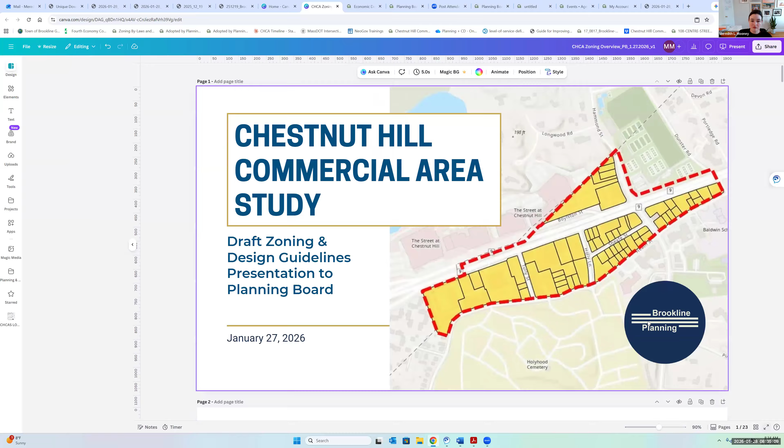And then we're also joined by our team at Sasaki, Martin and Ethan, who have been wonderful to work with as well. They're going to be presenting an abbreviated version of the design guidelines here in just a minute. But I did want to share my full screen and just walk through a quick presentation to orient you on some background about the broader Chestnut Hill commercial area study that the zoning and design guidelines have emerged from.

The origins of what we're now calling the Chestnut Hill Commercial Area Study are in the 2005 Comprehensive Plan. This was identified along with a series of recommendations you could put under the bucket of creating a gateway west along Boylston Street. I think the Planning Board is very familiar with the focus and attention we've had on Gateway East, in the Brookline Village area at the Boston-Brookline border, with the infrastructure improvement project and a lot of the development around Brookline Place.

So the vision in 2005 was that equal attention would be placed on the Chestnut Hill commercial area as the Gateway West. There was a suggestion about creating a district plan, looking for more opportunities for commercial mixed-use development, and amending the zoning to allow for broader uses. It talked specifically about the importance of amending the Office 2.0 zoning for the Chestnut Hill Office Park at 1280 to 1330 Boylston Street. Fast forward almost 20 years later, we are now talking about the Chestnut Hill commercial area and the district commercial area planning context.

Prioritized in the 2005 Comprehensive Plan. These are just a couple of important key considerations that we've been talking about today with this work.

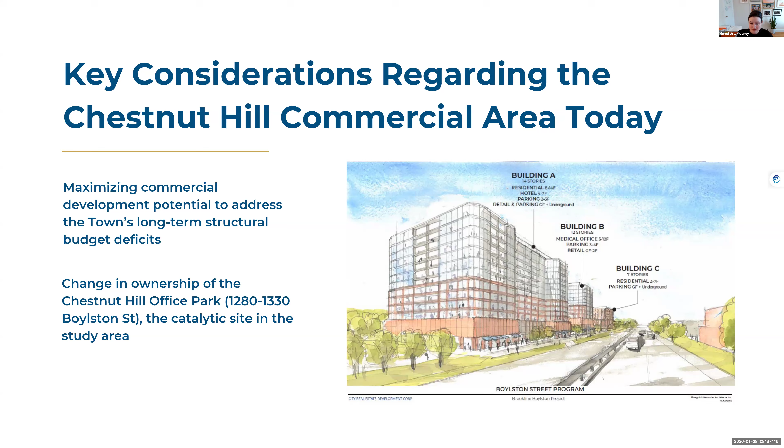Given the increased sense of urgency around the long-term structural budget deficits the town is facing, maximizing the commercial development opportunity in the Chestnut Hill commercial area is certainly a leading priority. As we were preparing to launch this study in spring of 2024, there was a change in ownership of the Chestnut Hill Office Park, 1280 to 1330 Boylston Street, a really uniquely large site throughout town—over 5 acres. It's something we've been talking about collectively for decades in terms of its economic development potential. Within the context of the Chestnut Hill commercial area study, redevelopment of the site really has the potential to be the catalyst for the evolution of the Chestnut Hill commercial area as a whole.

So the study goals, as we've talked about, are the importance of incentivizing significant net new commercial tax growth, trying to incentivize as much commercial development as possible, and then enhancing the livability and identity of the Chestnut Hill commercial area.

This is an overview of the timeline process we've undergone through the study work. We launched in spring 2024 with outreach and community engagement. This has been a staff-led initiative, in contrast to the select board appointed study committees we've traditionally had for these. We're experimenting with a new format.

We've been working with a community advisory group, which has included Mark as the planning board representative, and we're very grateful for all the time and energy Mark has invested in this. Blair has also attended a lot of those meetings. That group has been providing guidance and feedback to staff as we worked our way through this process. They've convened almost 20 times.

We've also been working with a subcommittee of the Economic Development Advisory Board that's been very focused on assisting staff with the study recommendations. The subcommittee with EDAB includes a lot of people who are actively, as part of their day jobs, involved in real estate development, and they've been very helpful in providing input about how we craft zoning that's actually going to be usable from the development standpoint.

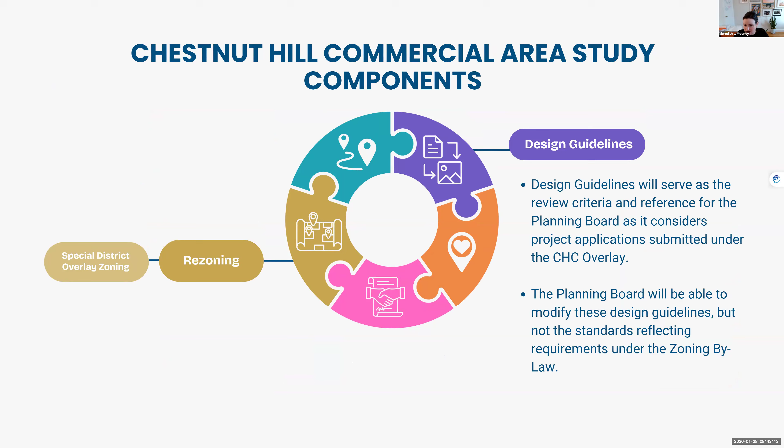The planning board will be able to modify these guidelines, with the exception of the standards baked into the zoning bylaw. But this is going to be your document, one that can evolve to reflect best practices and industry standards.

And that is just my introductory table setting. I will stop sharing and turn things over to Ethan and the Sasaki team.

Morning, everyone. I'm Ethan Lay-Sleeper, a senior planner at Sasaki, here with Martin. Martin Zogren, urban designer principal at Sasaki, working alongside Ethan, who I'll let run through the overall presentation so we get through it pretty quickly.

Yeah, sure. So we'll try to get through this in about 25 minutes. I know some folks have to leave at 9:30, so I want to leave enough time for conversation. I'll go fairly quickly, but we can always come back to slides in discussion. So let me share my screen.

Okay, so as Meredith said, this is an abridged version. Can you all see the presentation? Great. An abridged version of the design guidelines will give you a quick overview of the existing conditions. I'm sure a lot of you are familiar with those. We'll talk a little bit about the planning framework and what the objectives are.

Meredith alluded to those relative to the economic development potential, and then we really want to focus on the public realm and transitioning this from a somewhat disjointed series of streets and parcels and land uses to something that in the future can be more consistent with an intentional identity around new commercial uses and improved public realm and open spaces.

And then we'll talk a little bit about the massing controls. Those are what the advisory committee meetings have focused on and are really where the design guidelines and the zoning interlace. They're the elements that govern heights, setbacks, and density.

Then we have some conceptual eye-level views just to give a sense of what the existing conditions are, what the zoning envelopes look like, and then what architecture and building bulk might start to look like in the future. Not designs by any means, but just intended to convey a sense of scale.

And then in the appendix, we probably won't have time to get into that in the presentation, but happy to go into it afterwards. We have the design controls, which are a little more specific than the massing controls. They get into recommendations about materiality and have suggestions for future developers and architects to follow relative to the public realm, commercial buildings, residential buildings, and also parking structures. We've also done some quick shadow studies, just looking at the impacts of the zoning envelopes.

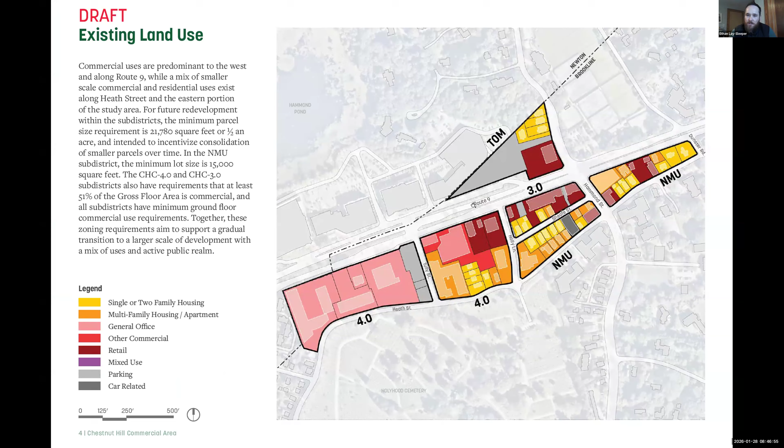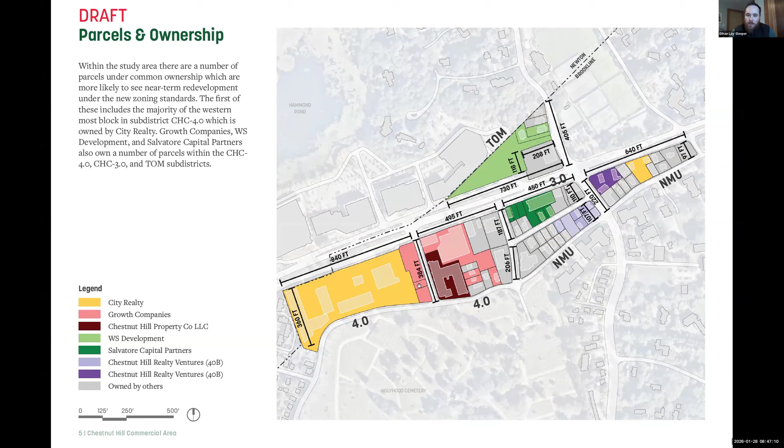The easternmost extent of the site, zoned as NMU, is largely a series of smaller lots, and they start to get somewhat bigger as you move further west and north into the transit-oriented district. Ownership on the east, all the parcels in gray, is varied. The parcels with colored fill show where there's consolidated or common ownership between parcels.

This is a map showing the zoning district. The neighborhood mixed use zones on the east side are comprised of largely smaller lots with disjointed ownership. The commercial 3.0 area has some smaller and larger lots than the 4.0 district west of Tully Street, with a large proportion owned by City Realty. The 4.0 district east of Tully Street has a fair amount of parcels owned by growth companies, and the transit-oriented mixed-use district has some parcels owned by WS Development.

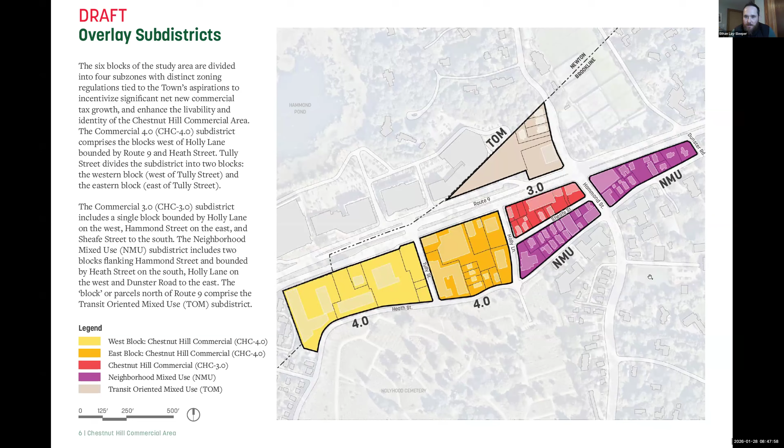So the planning framework - we reviewed some of the community engagement work that was done to arrive at these development principles. First and foremost, we want to develop this area as a unified district.

To Meredith's point about the economic development opportunity here and the budget shortfalls, we're prioritizing high density mixed use development to increase commercial tax revenues, while emphasizing green space and environmental resilience, thinking about how parking can be provided to ensure adequate parking without it being a dominant presence, and creating a pedestrian first environment.

There are some subtle things we're doing with setbacks to create more room for pedestrians, and requiring high quality architectural design focused on a human scale. That's where the massing controls and design controls start to work together to modulate building massing and form, but also think about materiality and articulation.

And certainly with the transit-oriented mixed-use district, we want to maximize transit integration and reduce vehicular trips. That zone specifically has a lower parking requirement, and we want to do everything we can to encourage folks to walk up to the T station there.

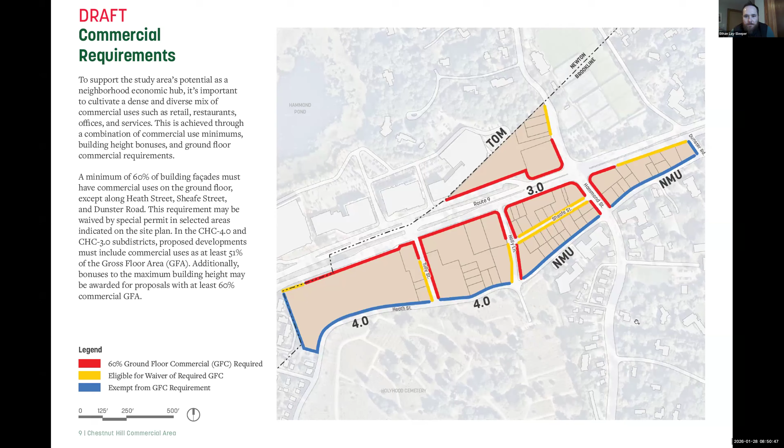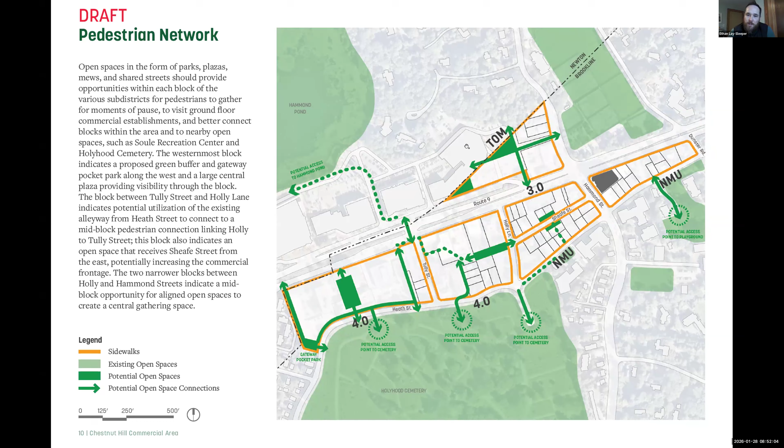Also thinking about the TOM district and opportunities to connect both north-south through that district, potentially to future trails around Hammond Pond, but also east-west into the street and what may eventually become of the Star Market site.

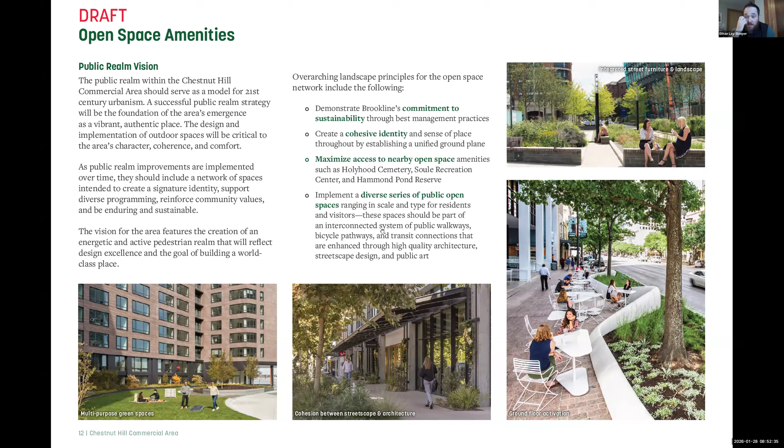So for the public realm, what we really want to encourage with the design guidelines is a commitment to sustainability, to creating a cohesive identity, and maximizing access to nearby open spaces with through-block connections, and creating a diverse series of public open spaces - it's not necessarily a one-size-fits-all solution for each sub-district.

There are varied tree canopy requirements. For smaller lots, there's a 2% requirement. For larger lots, a 15% requirement.

Within the NMU districts and 3.0 sub-districts, there are open space requirements tied to the number of residential units, whereas in the transit-oriented mixed-use district, it's more a percentage of the development parcel size. And in the TOM district, there's more flexibility on the amount of hardscape versus softscape.

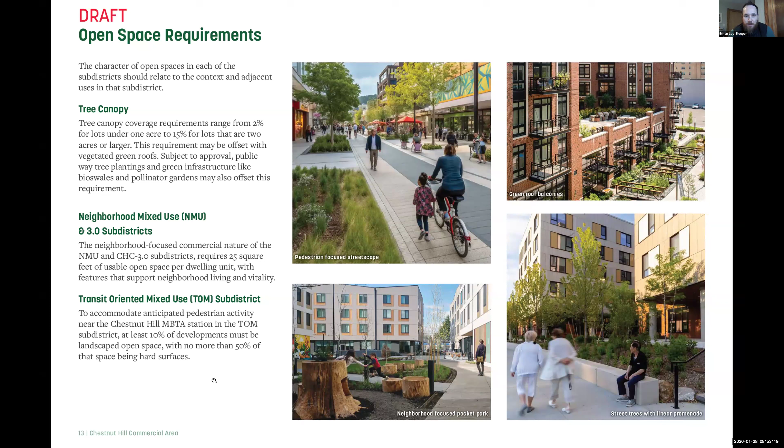Whereas in the 4.0 district, which is comprised of larger parcels and contiguous ownership, like the 5-acre parcel Meredith was mentioning, that's where we want to encourage larger open spaces. So there's requirements that at least 15% be open space, with up to 30% permitted as hard surfaced terraces, compared to 50% hardscape in the TOM district.

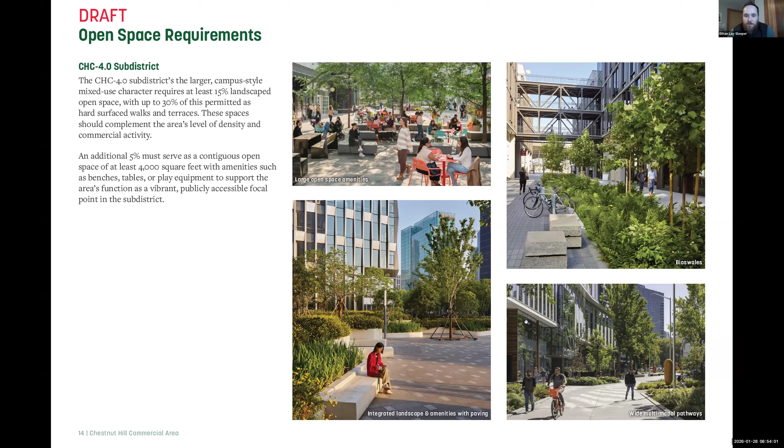That's really to help facilitate these through-block connections and provide a diversity of lush plantings, but also hardscape and spill-out spaces adjacent to buildings for people to use.

So jumping into the massing controls. This is the part that's really interlaced with the zoning that regulates building bulk. Taking a look at heights here.

Starting on the east with the NMU district, the base zoning heights are 50 feet with a bonus of up to 75 feet. That translates roughly to 4 to 6 stories. The 3.0 district is 88 feet, so that would be in the range of 7 stories.

The transit-oriented mixed-use district and the eastern extent of the 4.0 are also at 88 feet, to have a consistent height with the 3.0. You can see the northernmost portion of the TOM district steps down to 75 feet, 6 stories, as you move up Hammond Street. And then the center of the 4.0 east and west zones.

That's a 150-foot base zoning, in the 12-story range, with a bonus that could allow you to go up to 175 feet or 14 stories. And then it steps down again on the westernmost extent of the 4.0 district to that 88 feet, 7-story range.

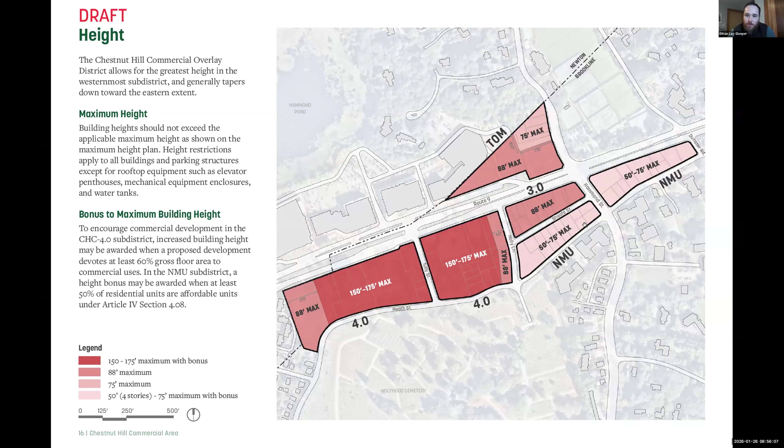So ground level setbacks play a similar role in terms of defining the public realm, but also helping to break down larger parcels.

This northern boundary of the TOM district has a 5-foot minimum setback, but there's a caveat that it could be reduced to 0, because we understand there's common ownership across the city lines here.

As we move further west and look at the southern border of the 4.0 districts, there's a 25-foot minimum setback from Heath Street, to provide additional landscape buffer and building setbacks along the Holyhood Cemetery, to preserve what people enjoy as a fairly green experience today, walking along the sidewalk and accessing the cemetery as an open space amenity.

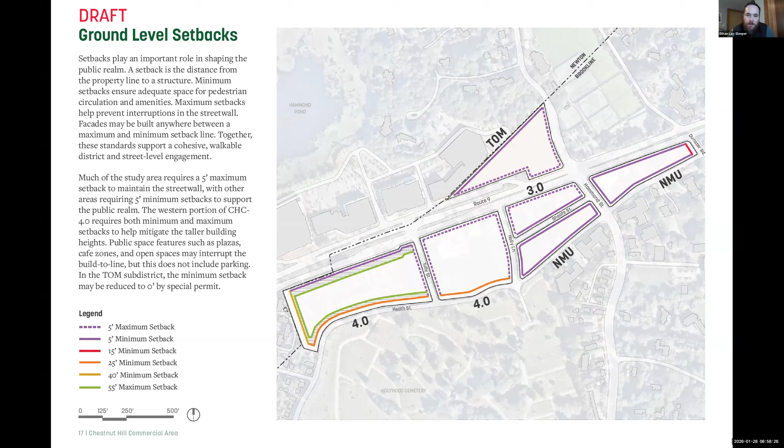And then in the westernmost 4.0 district, there's also a 55-foot maximum setback. We want the development to be within that sweet spot where it's providing enough buffer, but not set back so much that it feels suburban. There's also a 40-foot minimum setback on the west side to help buffer from the residential development to the west.

So this is an illustration of the zoning envelope. Just to explain the terminology, the zoning envelope shows the extent to which future buildings could be built, but a development proposal also comes with FAR requirements, height, and through-block connections. So the actual buildings would not literally take up as much space as these envelopes indicate. You can see some of the existing building massing ghosted in here.

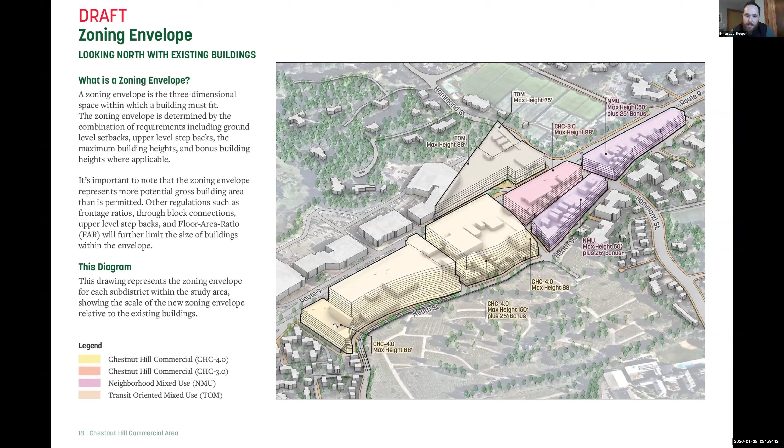The heights are consistent with the plan we just looked at, starting on the east with the neighborhood mixed use, in that 50-foot range with a bonus up to 75 feet. The 3.0 transit-oriented mixed use and the eastern extent of the 4.0 district are in the 88-foot range, then it steps up to 150 to 175 feet in the center of the 4.0 districts, and steps down again to 88 feet on the west.

This shows, on the 4.0 district, the 25-foot minimum setback, and this shows the 55-foot maximum setback.

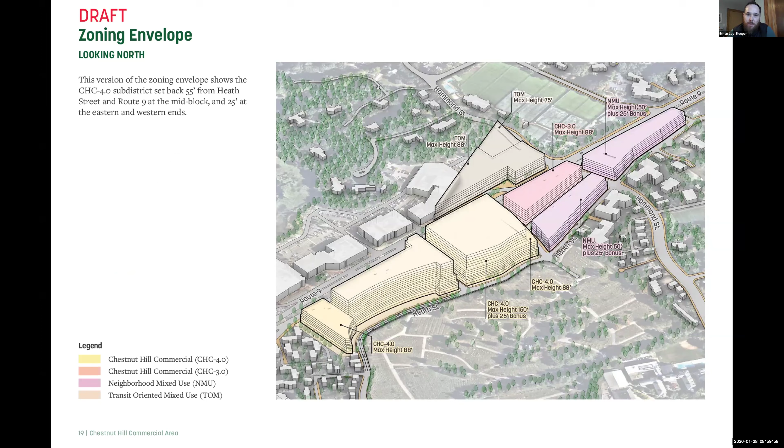Here's a view from the north looking south. We have the NMU district on the left side of the screen with the lower heights. Here you can start to see the transition from the 50 to 75-foot NMU and the 88-foot 3.0 to the step down in the 4.0 district at 88 feet, which then steps up to 150 to 175 feet as you move further west towards Newton.

This drawing also indicates what is required by various frontage ratio and through-block and open space connection requirements. These gray areas are not fixed, but represent a percentage of the total frontage and help create through-block connections, while also helping to break down larger building masses over 200 feet. This largely exists in the 4.0 district shown in yellow and the transit-oriented mixed-use district shown in beige.

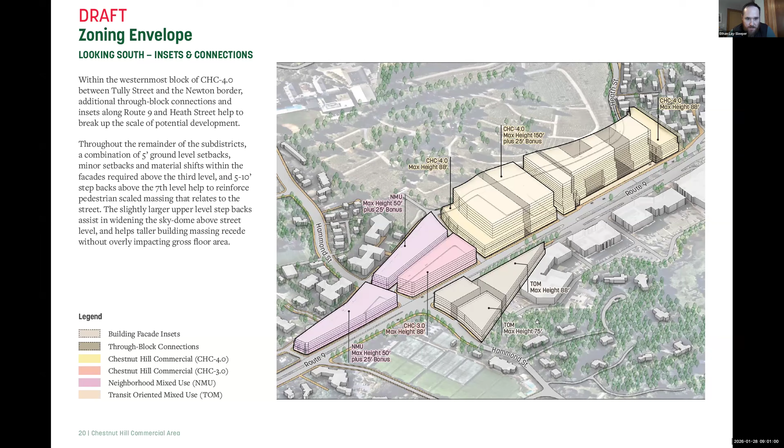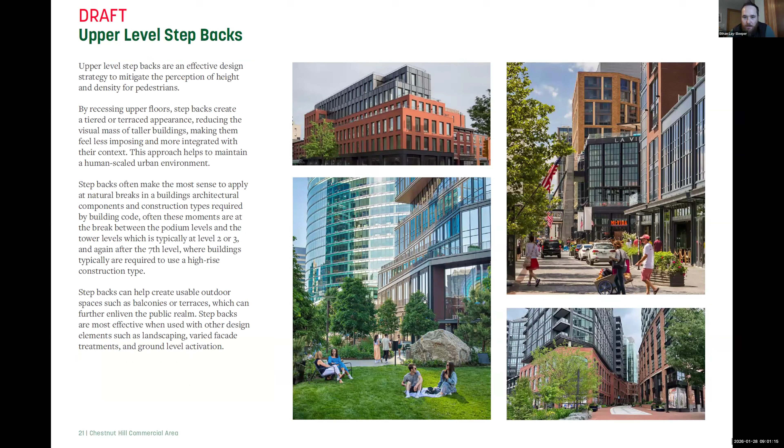Another way that we're modulating facades is through upper level step backs. These are a fairly effective design strategy to help mitigate the building massing and help upper levels of taller buildings recede.

In addition to that, we're also integrating horizontal datums, and again these are not necessarily a one-size-fits-all solution. We have upper level step backs required above the 3rd or 4th level in our taller buildings in the 4.0 district, and above the 4th level in our lower scale districts like the NMU. That goes for the horizontal datums as well.

Now, these are more just architectural expressions. They can be something like a cornice or architectural detailing that occurs either above the 1st or 2nd level in our lower scale districts like the NMU, up to the 3rd level or wherever the podium stops in commercial construction in the 4.0 and 3.0 districts.

Another element we're incorporating into the design guidelines is the idea of gateway corners. These are areas where we want to emphasize the transition from the Route 9 corridor into this series of commercial sub-districts. So we're emphasizing this gateway at Route 9 and Hammond Street.

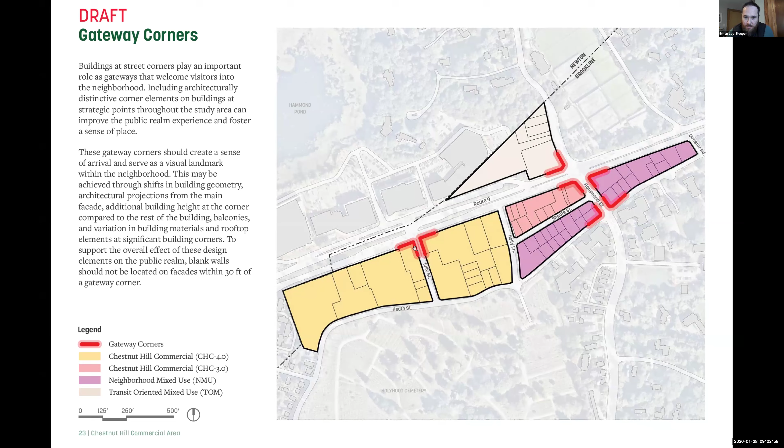As you're moving east along Route 9, the corner of this TOM district, the 3.0 district, and these NMU districts, also moving north-south there, as well as the entrance from Route 9 heading east onto Tully Street, these are opportunities for architects to start to break down the corners, whether at upper levels or lower levels with insets and canopies.

We're providing general guidance here, but the idea is that we build in enough flexibility in the design guidelines to allow architects and developers to work with the planning board and the planning department to create unique architectural identities at these signature corners.

So we'll jump into some eye-level views now. Again, these are not intended to be architectural designs—they're just quick representations of what could happen in the future.

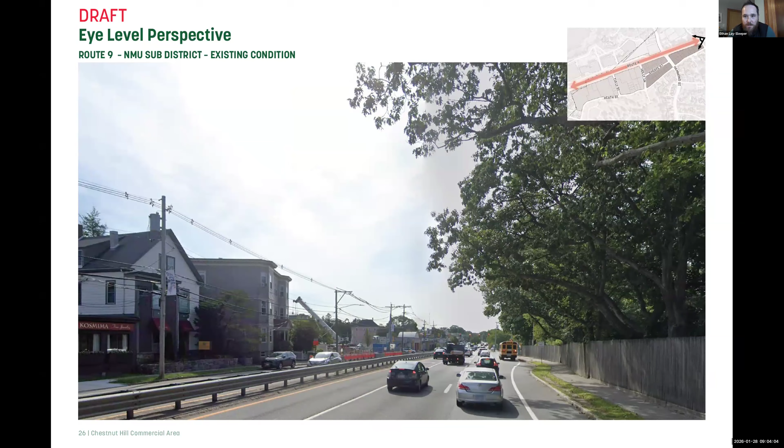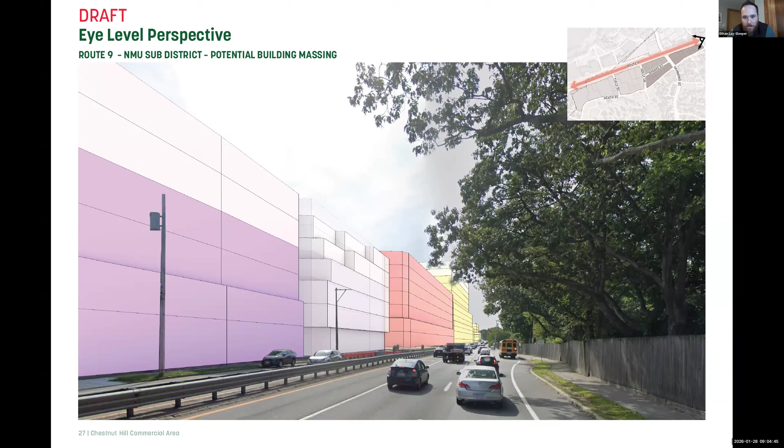In the NMU district, the purple indicates the 4-level base zoning, and by bonus, through providing more inclusionary housing, you could get up to another 2 stories. In the back, you're seeing the 7 stories permitted in the 3.0 district, and beyond that, the 4.0 district, which allows you to go up to 150 or up to 175 feet with a bonus, with that 60% commercial requirement. Just a quick sketch of what that could start to look like.

So again, we're seeing some of the actual approved architectural designs of that 1180 Boylston project. We're seeing the bonus scenario, the full 6 stories of the NMU district on the west here, and we're seeing those commercial 3.0 and 4.0 districts beyond.

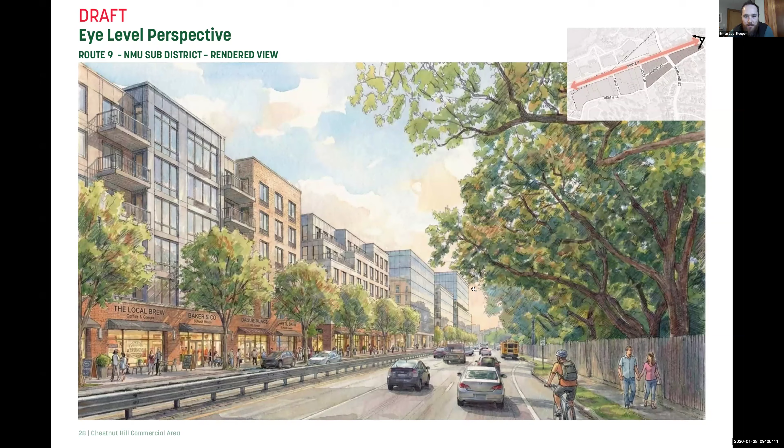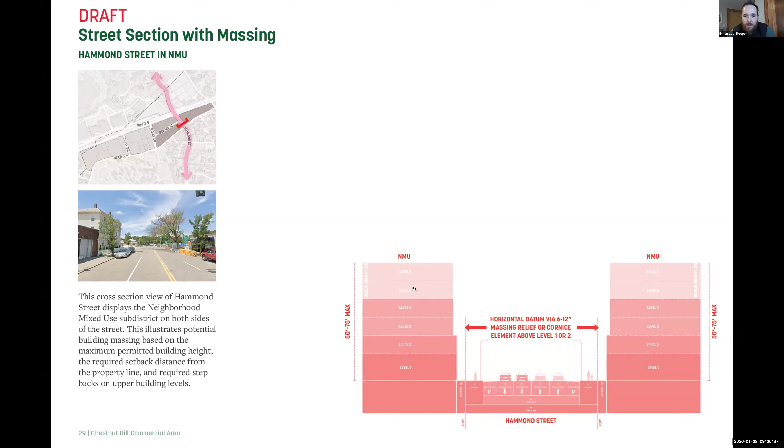So this next view, we're going to be looking north from Hammond Street, kind of between the two NMU districts. We can see how the base zoning allows up to 4 stories or 50 feet, and then with the bonus achieved by providing additional affordable housing, you can get up to 6 stories or 75 feet.

So again, this is where there isn't a one-size-fits-all solution. One thing we're doing in the neighborhood mixed-use zone, from Heath, from Dunster all the way to Hawley, is along that Heath frontage, we're requiring a 10-foot upper level step back above the 4th level. So if a developer was to take advantage of that bonus, those additional floors would be set back a little bit from Heath Street to help step down the scale.

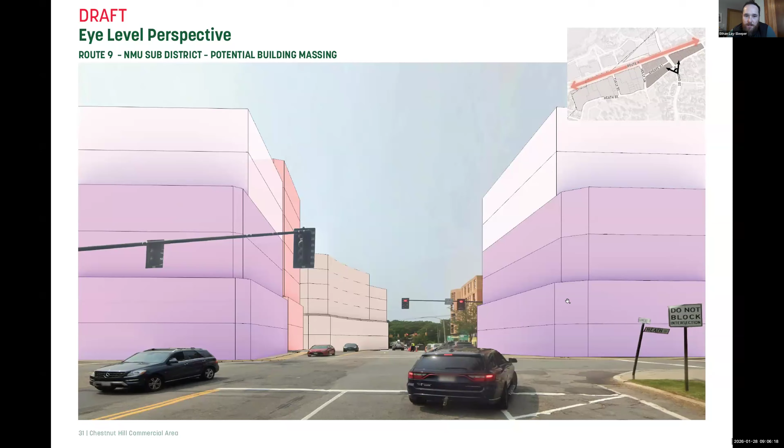And this is what that could start to look like here, with some commercial along Hammond Street, potentially wrapping around a little bit onto Heath Street, and then some upper level step backs. You can see the transit oriented mixed use district in the background here.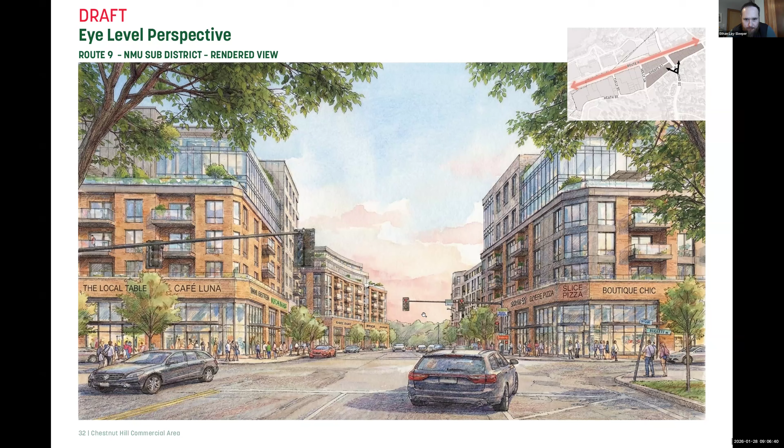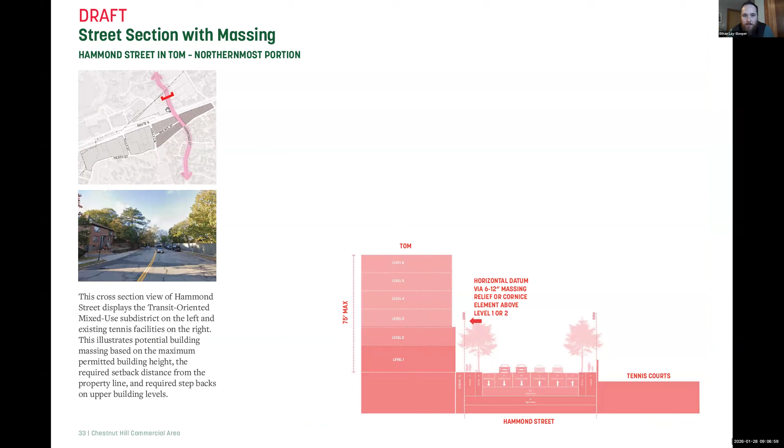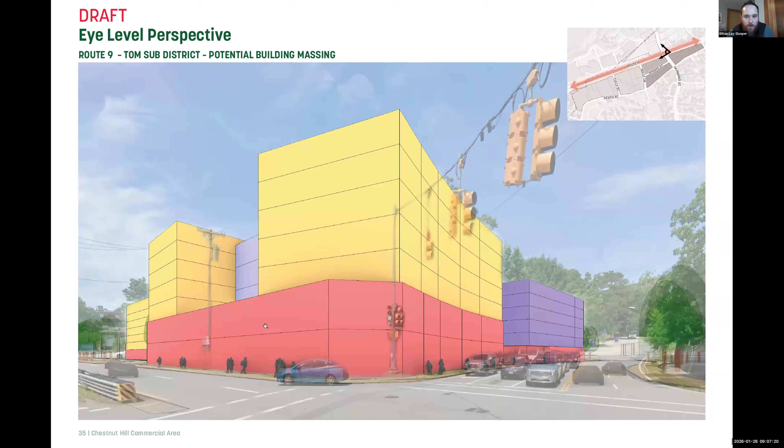This is a little bit more refined than just the zoning envelope. We're imagining perhaps some hotel, residential uses and ground floor commercial per the requirements, and what it could potentially look like.

So lower heights as you move further north up Hammond Street, and then 7 stories. It could be residential, it could be commercial, but the key is providing that 60% active commercial frontage along those hard corners of Route 9 and Hammond Street.

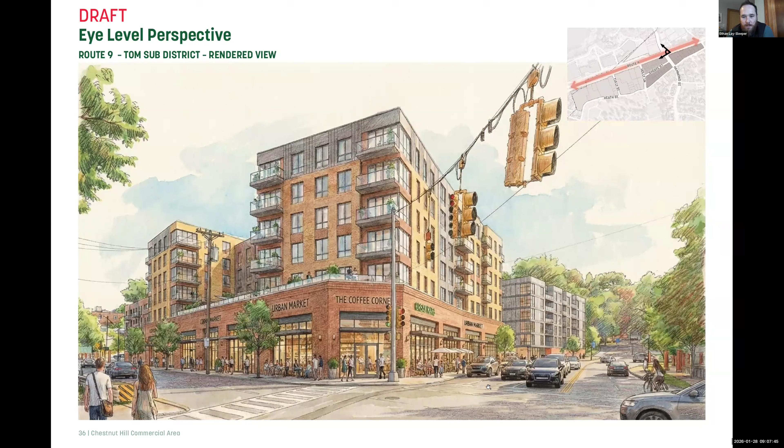And again, the step backs along Heath are more significant than the step backs along other streets or frontages. That's really to provide a little bit more relief to the notion that Heath Street can become more of a kind of a green corridor, and that we can emphasize that through additional street plantings and greenery there.

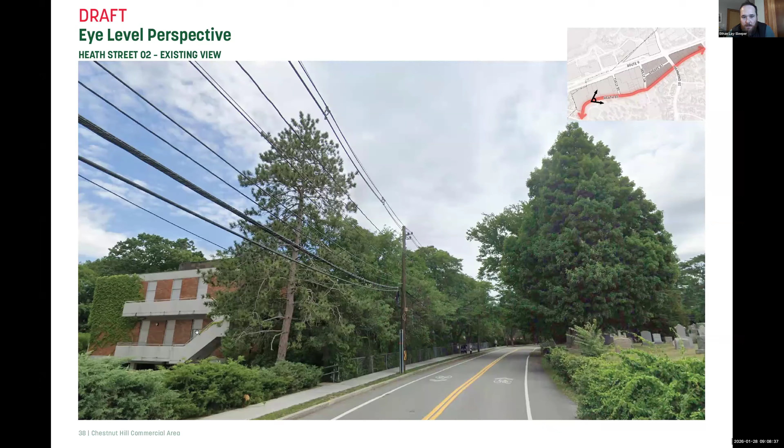So this is kind of what it looks like today. We have the cemetery on the right and the existing office uses on the left. This is the proposed massing.

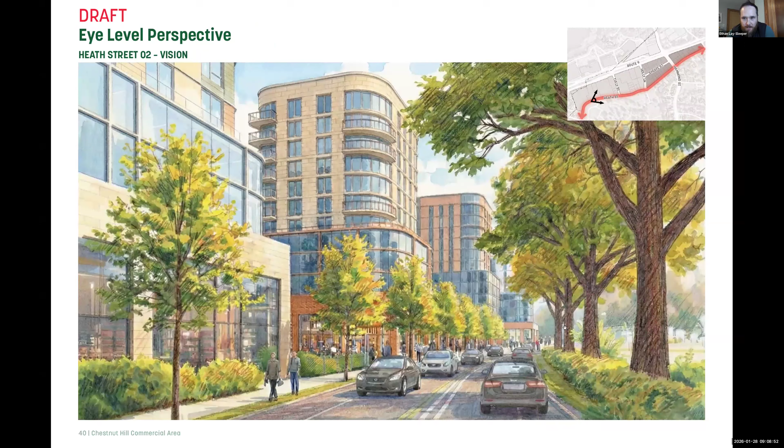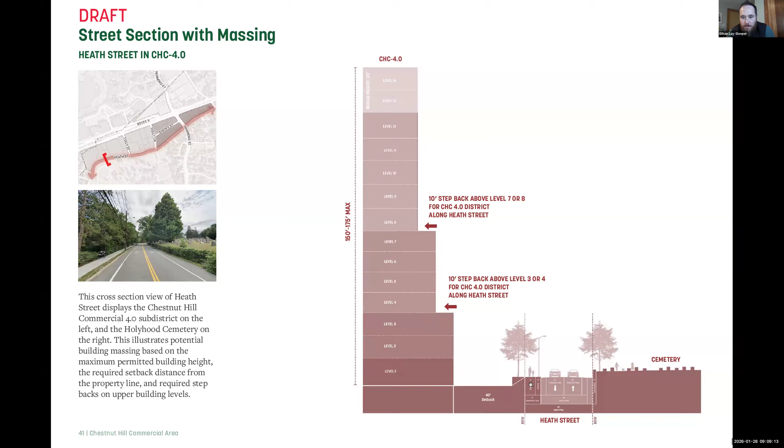And then this is what it could look like in the future, heading east along Heath Street there. And then another view a little bit further back on Heath Street. Again, the elevation of Heath Street is in the ballpark of 8 to 10 feet higher than Route 9, so these buildings will actually be depressed a little bit from the street elevation as you're walking.

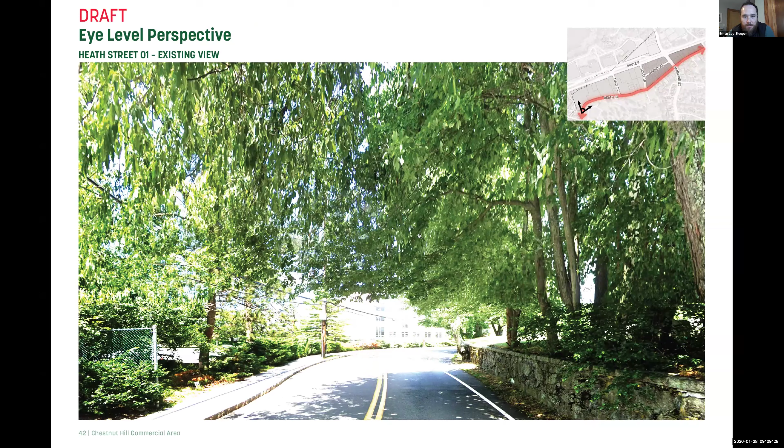So this is a view kind of coming up as you're coming around that curve onto Heath Street, the first opportunity to view that proposed development. So this is what the current development proposal looks like that fits within the zoning envelope, and what it could potentially look like with new landscaping and a little bit of articulation on the buildings.

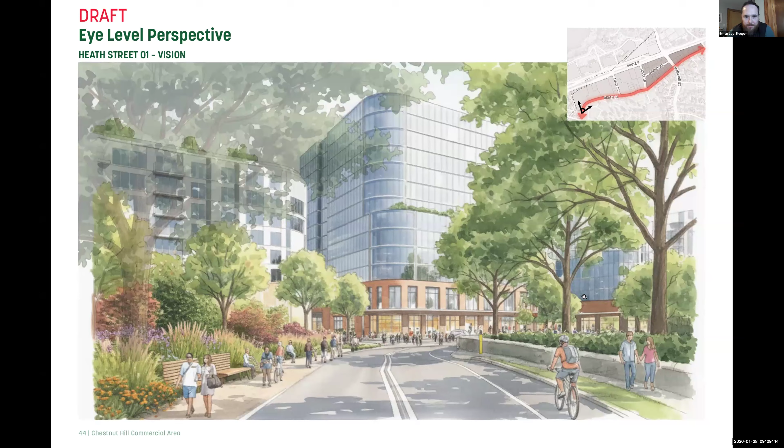I'll wrap up in a second here. So this is a section cut through Route 9. We have the street on the left side of the image with some of the retail parking, and then we have Route 9 in the middle.

And this is where we're seeing that taking advantage of that maximum 55-foot setback. Along Route 9, we're saying that you could do a 5 to 10-foot step back. We're not requiring a full 10 feet, because there's slightly fewer folks walking on Route 9, and it's trying to be more deferential on the Heath Street side with the 10-foot setback.

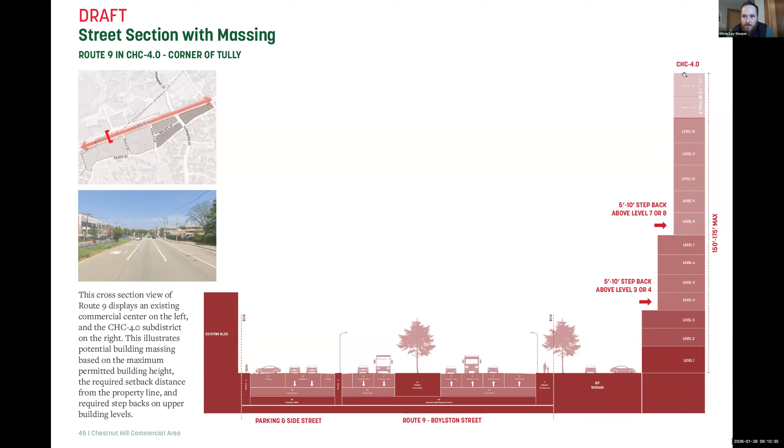And again, we can see the 12-story 150-foot base zoning up to 175 feet with the bonus for the 60% commercial requirement. So this is the existing condition today.

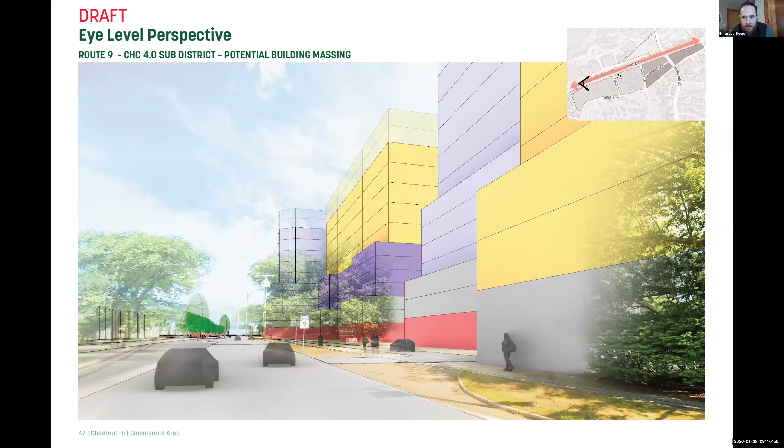So I know that was a lot, so I'll stop there and open it up to questions, or Meredith, if you want to do a quick recap.

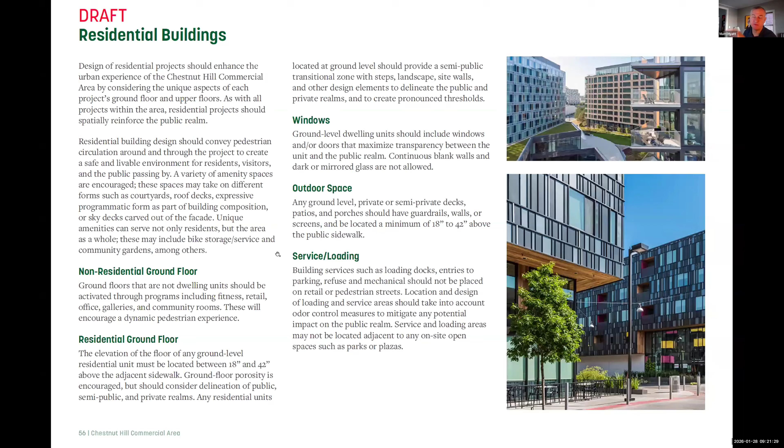And I can pull up the shadow studies really quickly here. If you wouldn't mind just showing those 3 pages, and then anyone who's interested could go to our agenda, open the document, and spend some more time looking at those. The short story here is the cemetery doesn't get any shadow because it's on the south side, but we'll look at March, 9 a.m. - so you've got shadows extending out across Route 9.

Then March noon, they're not extending out quite as far. The sun's higher in the sky. March 3 p.m., they're tilting a little bit to the northeast. March 6 p.m., it's dark out.

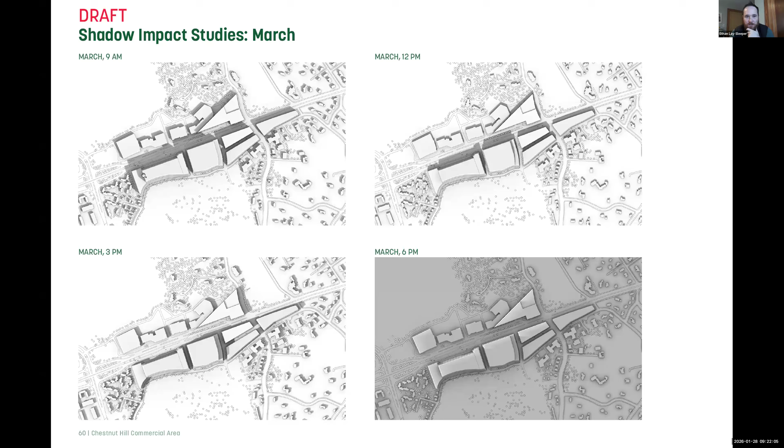June, summer solstice, 9 a.m., they're extending into Route 9, not quite as far as March obviously. Same story at noon in June, they're covering the sidewalks essentially on Route 9.

3 p.m. they're really just shading Tully, Hawley, parts of Hammond Street. June 6 p.m., that's sunset, so they're starting to extend a little bit further to the southeast there. And then September, it's pretty much identical to March.

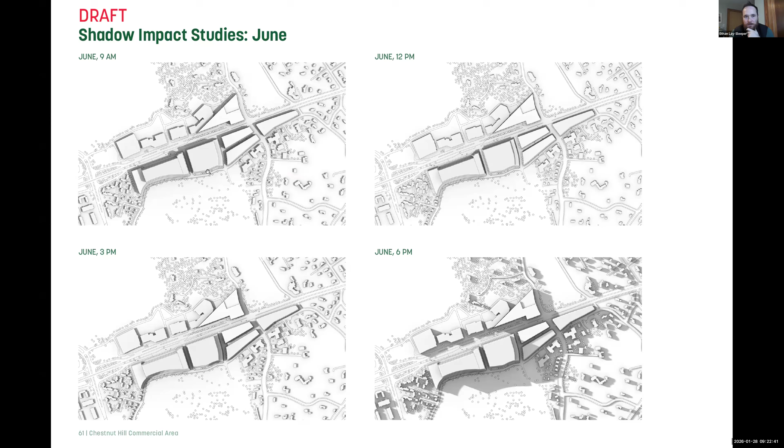Ethan. We'll go to Steve for the hand up next.

Yeah, first of all I'm going to reiterate some of the things my colleagues have mentioned. I attended an EDAB meeting a couple of Friday afternoons ago, so I looked at some of this documentation prior to that meeting, and it looks like there's been some additional information added. I didn't look at the materials for this meeting, but I'm glad to see it's been fleshed out a bit. I echo Matt's concern about the amount of commercial that's required, and Matt's firm knows as much about doing commercial and mixed use development as any firm around, so I take his concern seriously.

And it also rings true when I look at how difficult it's been for even more modest developments, like a couple of the 40Bs on Harvard Street in the Coolidge Corner area, to fill their modest commercial spaces. And then there's the big commercial space that's still empty in Brookline Village at the Children's Hospital building. I understand that's a developer that's not particularly motivated, that maybe doesn't care about deriving income from their ground floor space, but still to leave it empty, it makes me ask how much demand there is for that kind of space in these locations.

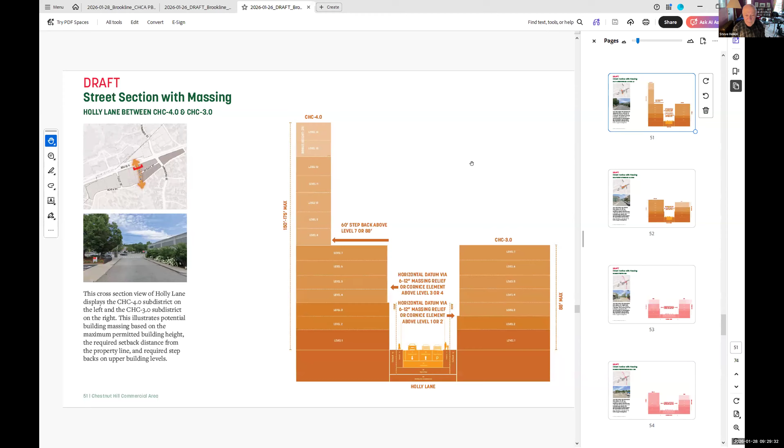I don't think we're going to cover everything tonight; we'll probably go until 10 at most. I hope there's an opportunity for planning board members to get into the weeds in a more workshop-style setting, like what Steve was looking at with those cross sections—I think those are very important issues. Not to put you on the spot, Mark, but as a member of the committee, do you have some comments you'd like to share?

I do, and it would be very easy for me to get into the weeds given what I know and what we've discussed, so I'll try to keep it at a higher level.

Looking at this development and how it came about, it's interesting that the 4.0 district was actually developed by a financial analysis, and that's okay. But looking at the neighborhood input and other input discussed regarding building heights, there's a disconnect—no connection to Heath Street leads to maybe too much circulation on site. Then you ask, why wouldn't we include the other areas in the 4.0 district as well, or the next area over, if we're trying to maximize what we want to develop here?